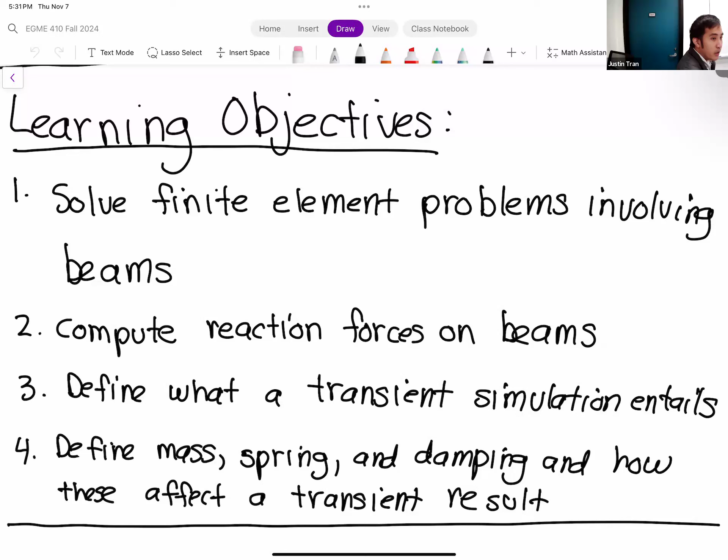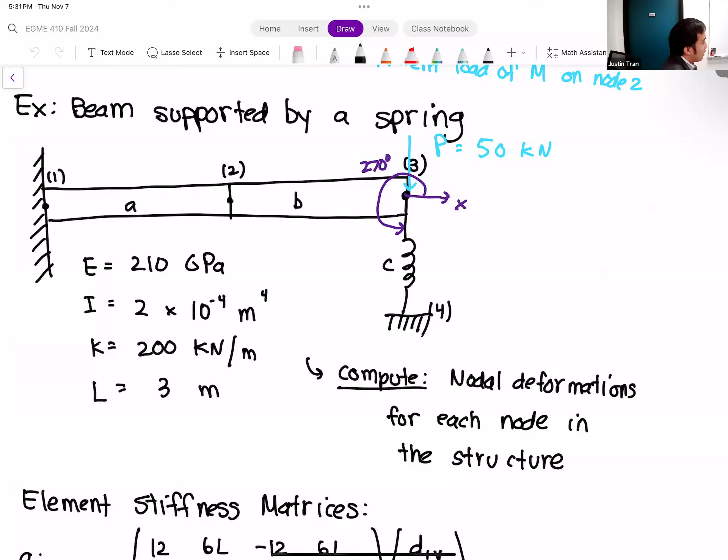Okay, all right, so let's go ahead and pick up where we left off. So actually, let me go ahead and scroll up, just so you can look at the problem that we were looking at before, okay? So last time we were here on Tuesday, we were working on this beam problem. So you can see here we have two beams, beams A and B, and they're being supported by a spring on the right. Okay? So this is a combination of beam and spring elements in the same problem.

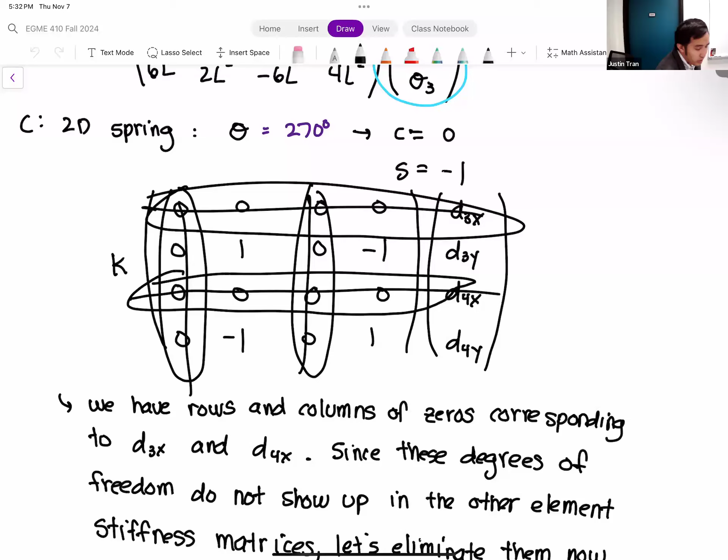So we were working through this problem, and we computed the element stiffness matrices for each element, and that includes the two beams and the spring, okay? So for the spring, we did something a little bit special where, even though it's technically a two-dimensional spring, because that spring is rotated upwards, we saw that there's no reason for us to keep the x deformations in our spring equations, okay? So we basically removed them, and we ended up with this element stiffness matrix here, where we have k times 1, minus 1, minus 1, 1, times the two y direction deformations, d3y and d4y.

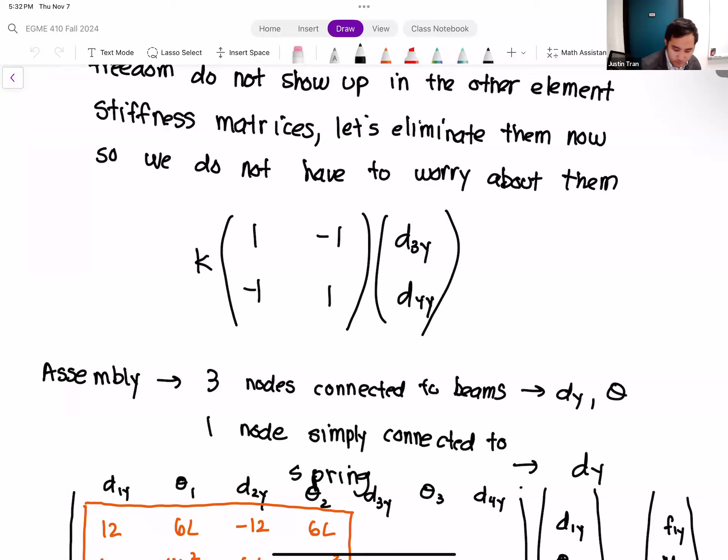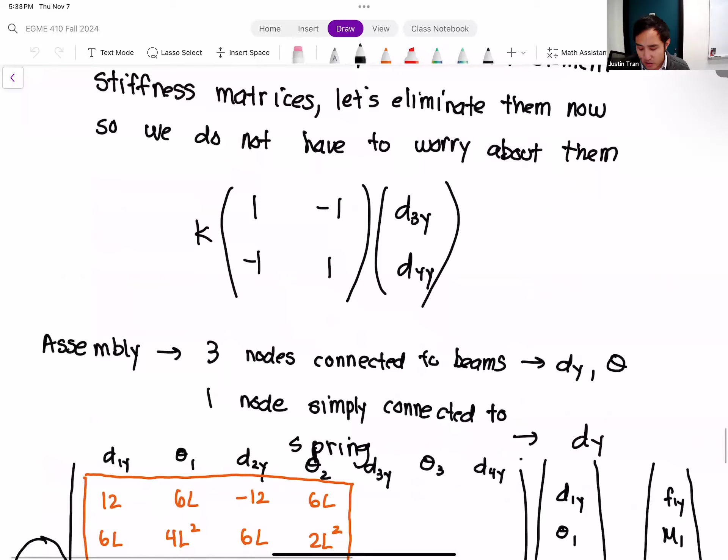Okay. And so the last thing we did was we input these into our stiffness matrix here. So we included the element stiffness matrices for our two beams, element A and element B in orange and green. And then our spring we input in purple down in the bottom. Now remember the key point here is that, because the constant out in front of the spring element stiffness matrix is different than the beams, we just need to make sure that we account for that when we add these into our equation here. Okay, so that's where we left off. Let me go ahead and fill in all of the blank spaces too with zeros. All right, so there is our fully assembled global stiffness matrix.

So the next thing we need to do here is we need to apply our boundary conditions. And so we had two constraints and one load here. So we go back up to the figure. We can see that we have a fixed support on node 1. We have a fixed support on node 4. So those are our two constraints. So let's go ahead and apply these first to our global matrix.

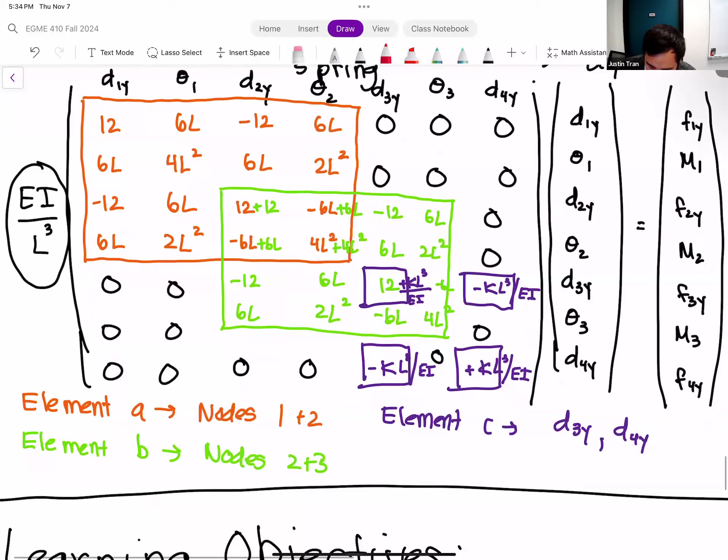Okay, so fixed support on node 1 means that we're going to cancel out both of the degrees of freedom at node 1. So that means d1y and theta 1. So let's go ahead and clear those out. So that means this first row here and the second row. All right, so let's do what we usually do when we have constraint type boundary conditions. Let's replace the entire row. And so we're going to have zeros in every single entry except for the diagonal entry.

So that means for the first row here, we have 1, 0, 0, 0, 0, 0, 0. And then on the right hand side, instead of f1y, we're going to replace that with a 0. And then in the second row, we have 0, 1, 0, 0, 0, 0, 0, and then we replace m1 with a 0. All right, so same as we always do.

All right, the other constraint type boundary condition that we had was on node 4. Now we only have one row here that corresponds to node 4 because it was only attached to the spring. So that's going to be the last row in the matrix.

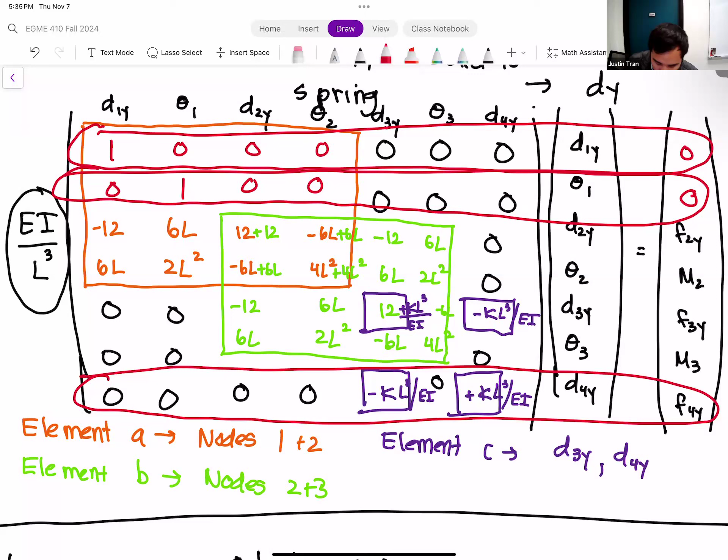Okay, so once again, we're going to replace everything with zeros here. The only one that's going to be non-zero is going to be the diagonal entry, which for the last row is going to be the last column. And we're going to put a 0 in the right-hand side. Okay, good. So our constraints are taken care of now.

Next thing we need to do is to incorporate our load. And so we go back up to the problem. We can see that we have only one load applied on this figure, which is a load of 50 kilonewtons applied in the negative y direction on node 3. Okay. And so we go to the row here that corresponds to the y direction on node 3, and so that is what number? 1, 2, 3, 4, 5th row. Okay.

Right, and so since it's a load type boundary condition, we're only going to place the load in the right-hand side vector. And so we have a load of minus P over there. And then everything else, because we don't have any other loads, we're just going to replace everything on the right-hand side vector with zeros. Okay.

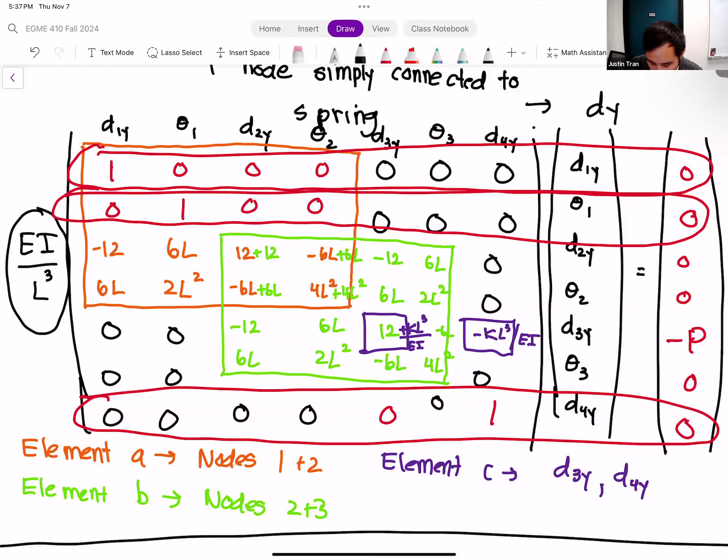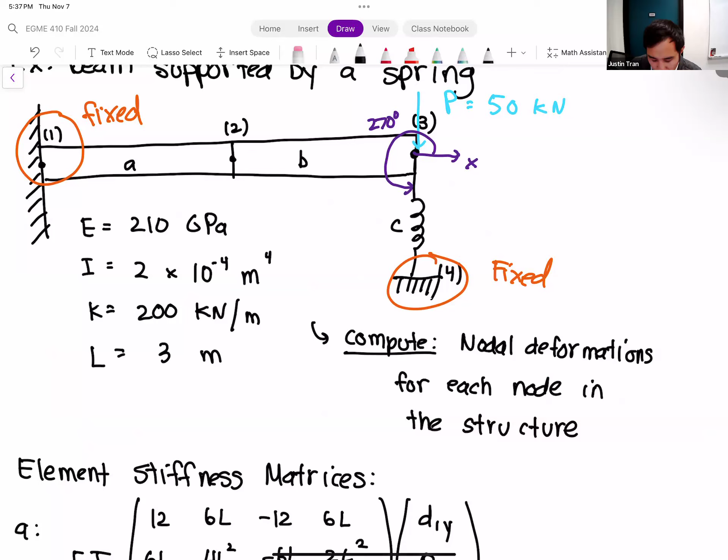All right. So we finally have our linear system here. And so let's go ahead and solve it. We actually have numbers here that we can plug in. Just to remind you, the numbers for this problem are, we have a Young's modulus of 210 gigapascal, a moment of inertia of 2 times 10 to the minus 4. For the spring, we have a spring constant of 200 kilonewtons per meter, and the length is 3 meters.

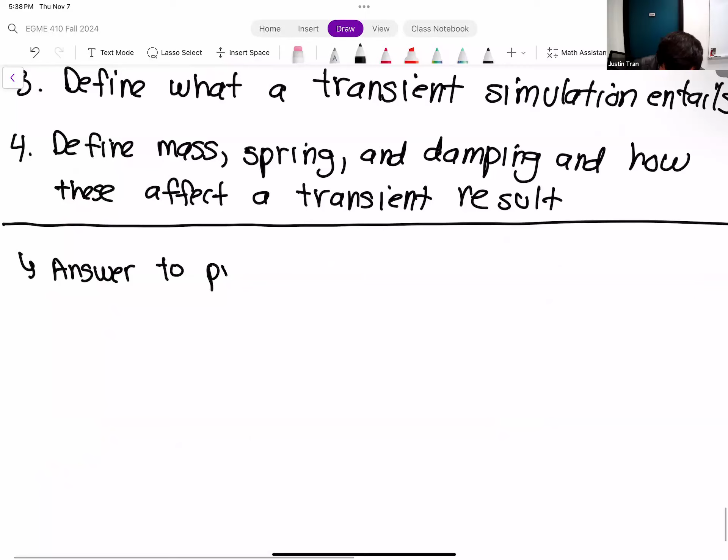Okay. And so we plug all those in as well as the value for the load. And I was not smart about this, so I didn't leave room for it. So let me go ahead and write the answers down here. And so we plug all these into MATLAB, and what we get is: first we have the deformation and the rotation at node 1. So we have d1y, theta 1. Remember, node 1 was fixed to the wall, and so these should give us 0.

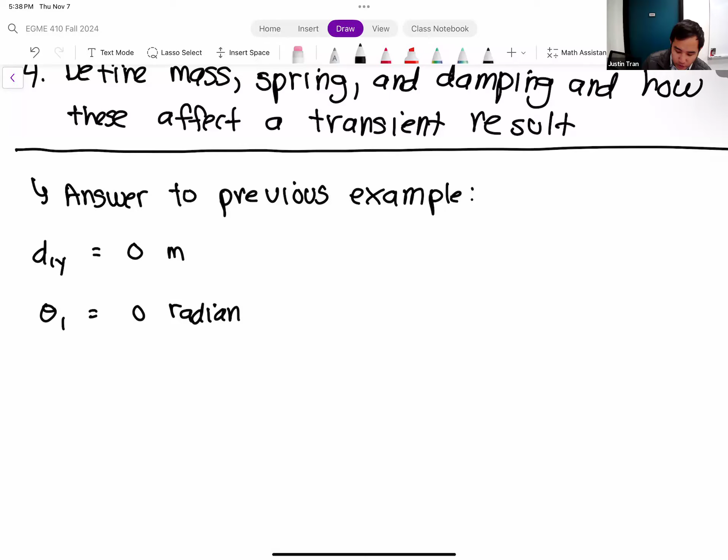When you solve for the rotations in beam problems, usually they're given in units of radians, okay, which is technically unitless. But there is a difference when you express angles in radians versus expressing angles in degrees. Okay.

Next, we have the deformations and rotations at node 2. So this is the node in between our two beams. Okay. And so we plug into MATLAB, and what we get is d2 is minus 0.02 meters. Okay. And the rotation here is minus 0.012 radians.

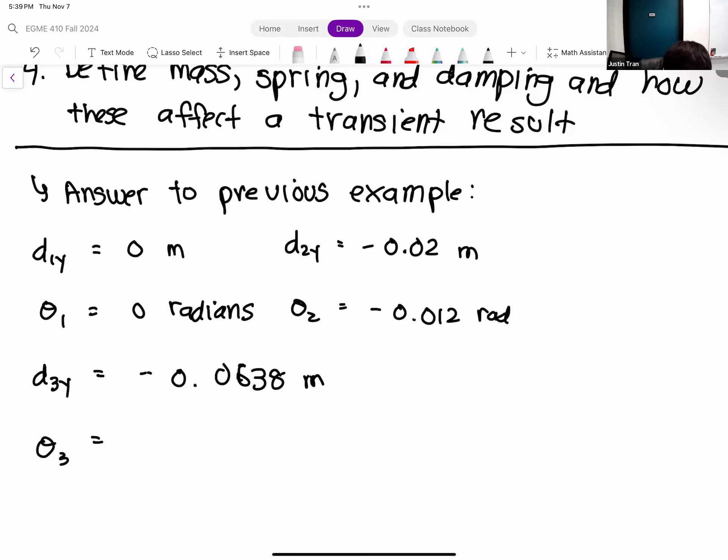Okay, then we have the same solution at node 3. So for node 3, we have a deformation of minus 0.0638 meters. Okay. And then theta 3 here is minus 0.016 radians.

Okay, and then finally we have d4y, node 4, the only node that's attached to the spring. It's also attached to the ground. And so we end up with a vertical deformation of 0 for node 4. Okay.

So of course, getting these numbers, it's almost a little bit meaningless to go over this in the lecture, just because it's all about plugging into this matrix here, putting it in MATLAB, and you somehow get this. Okay, but in case you want to run through the problem yourself and make sure that you got the right answer, you got the right matrix, then this is the result here. Okay.

By the way, people have asked me, what is the midterm exam going to be like? So of course, you're not going to be able to use MATLAB on the exam, and so I'm not going to expect you guys to compute solutions like this. I know some graphing calculators are able to solve linear systems, but not everyone has a graphing calculator like that. And so for the exam,

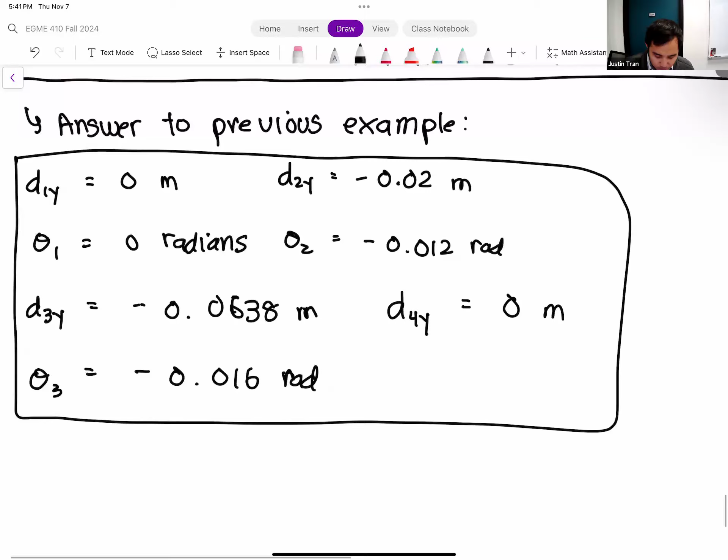my only expectation is that you're able to get to this point right here, okay? So you should be able to define the global stiffness matrix. Actually, you should take it one step further than this. You should at least plug in all the values here, okay? And so if you're able to show me the global stiffness matrix with all the appropriate values and all of the boundary conditions properly fitted in, that's what I'm gonna ask you on the exam, okay? All right, any questions on this?

Okay, good. All right, so one last point before we move on from direct stiffness is this idea of computing reaction forces.

Okay. So what are reaction forces? Reaction forces are forces that are placed on your model that are not explicitly external loads. Okay. Another way to put this is that in order for your structures here to achieve static equilibrium, right? What do we know about static equilibrium? We know static equilibrium exists when the sum of all the forces on a model equals 0. Okay.

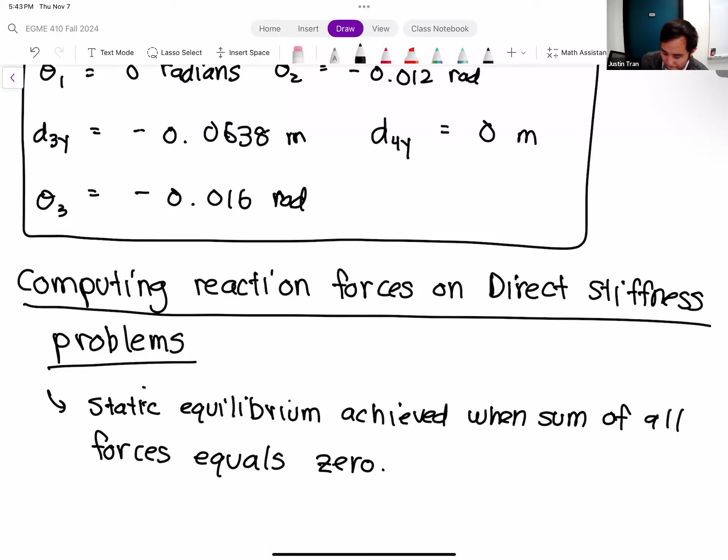That's kind of the first thing that you're taught in introductory physics. Okay, so all the structures that we're considering are in static equilibrium, but we enforce it in a slightly different way. For our finite element problems, the way that we enforce static equilibrium is by enforcing these constraints, right? So we have our fixed supports, roller supports and pin supports. In reality, these supports or constraints have to exert forces on the model in order to maintain static equilibrium.

These forces that are applied at our constraints, we call reaction forces, because they are exerted in reaction to other external loads. It's the same thing with us, right? Just by sitting or standing in this room, your body is mostly in static equilibrium. No one is shooting across the room at 50 miles an hour. There is a constant force of gravity being applied on us, so to maintain static equilibrium, the ground has to exert an equal and opposite reaction force upwards. That's basically Newton's third law.

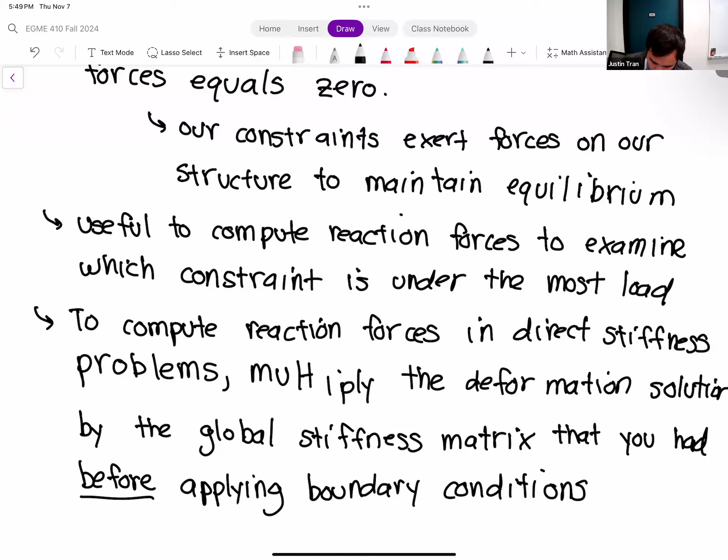Okay. But you're not going to multiply it by your final global stiffness matrix. You multiply it by the global stiffness matrix that you had before you applied the boundary conditions. Step one of our direct stiffness methodology is to write out the element stiffness matrices for all the elements. Step two is to assemble them into the global stiffness matrix. Step three is to apply the boundary conditions. So in between step two and step three, we had a global stiffness matrix. It wasn't one we could solve, but we can use it for this step.

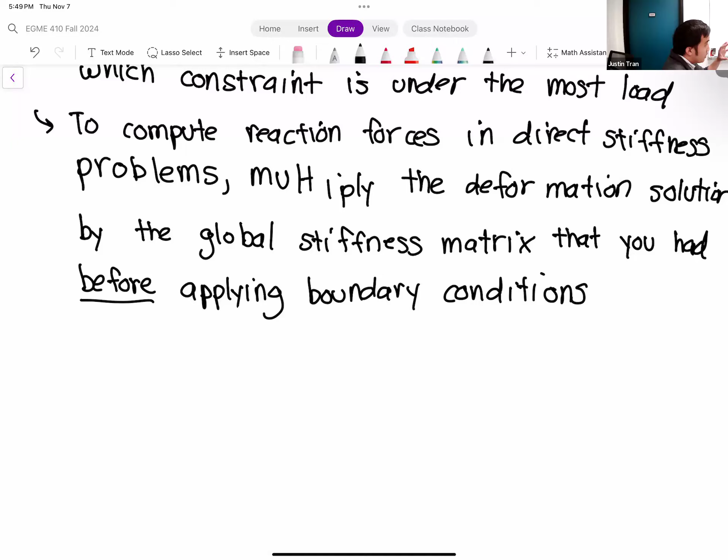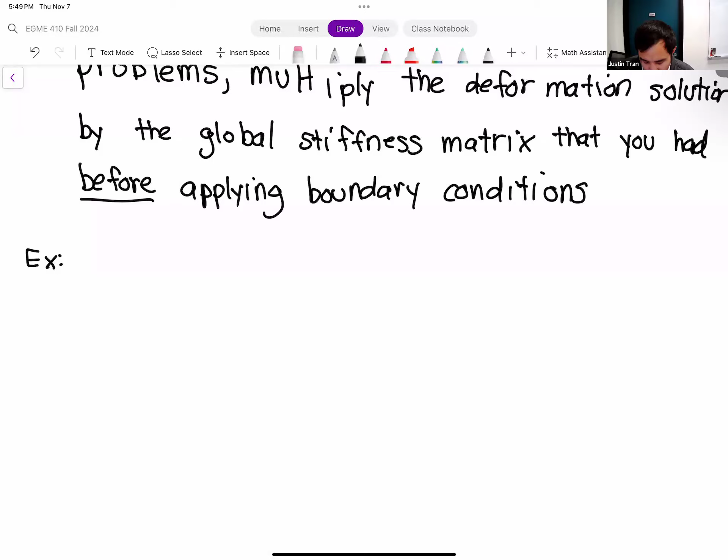So for example, for the last problem, let me write out our global stiffness matrix again, but before we apply the boundary conditions. The matrix I had in the previous problem was our matrix after we applied the boundary conditions. If you're watching this on YouTube later and rewind to the beginning of the lecture, the global stiffness matrix you saw there wasn't the matrix we wanted. Okay.

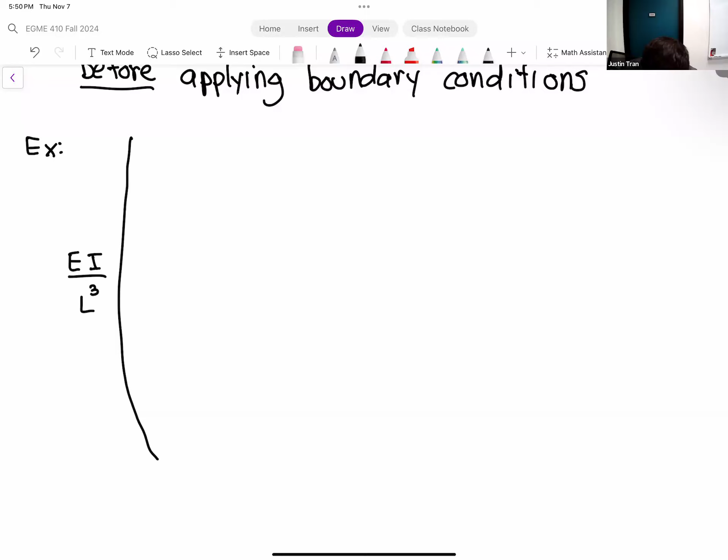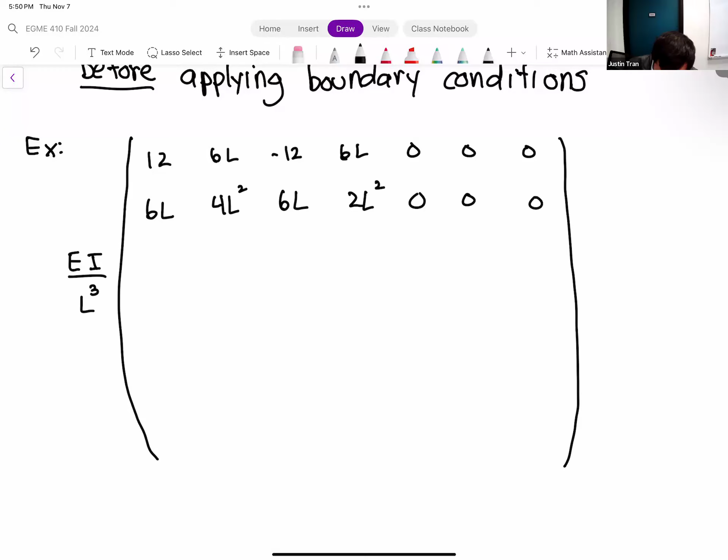So if we write out that matrix again, we get EI over L cubed multiplied by a 7x7 matrix. The first row is 12, 6L, minus 12, 6L, 0, 0, 0. Second row is 6L, 4L squared, minus 6L, 2L squared, 0, 0, 0. Next row is minus 12, minus 6L, 24, 0, minus 12, 6L, 0. Then 6L, 2L squared, 0, 8L squared, minus 6L, 2L squared, 0.

0, 0, minus 12, minus 6L. Now we have this weird term here that has our spring constant: 12 plus K L cubed over E I. Minus 6L. K L cubed over E I.

Next row: 0, 0, 6L, 2L squared, minus 6L, 4L squared, 0. I know this is painful. Usually we don't do this, but because I didn't have the foresight to do this, I just applied the boundary conditions straight on the matrix from earlier. So this was a consequence of my own demise.

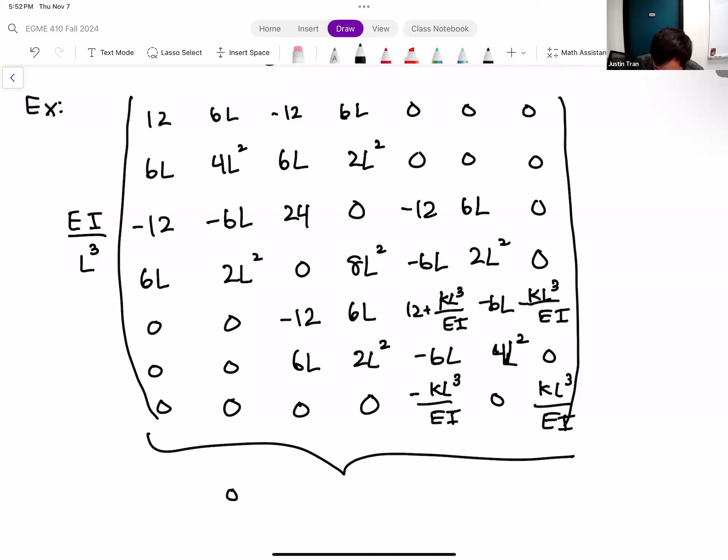All right, but we're on the last row. Last row is probably the easiest. So it's mostly zeros here. We have minus KL cubed over EI, 0, and then positive KL cubed over EI. Okay. So this right here is our original global stiffness matrix. This is the one that we had before we applied boundary conditions.

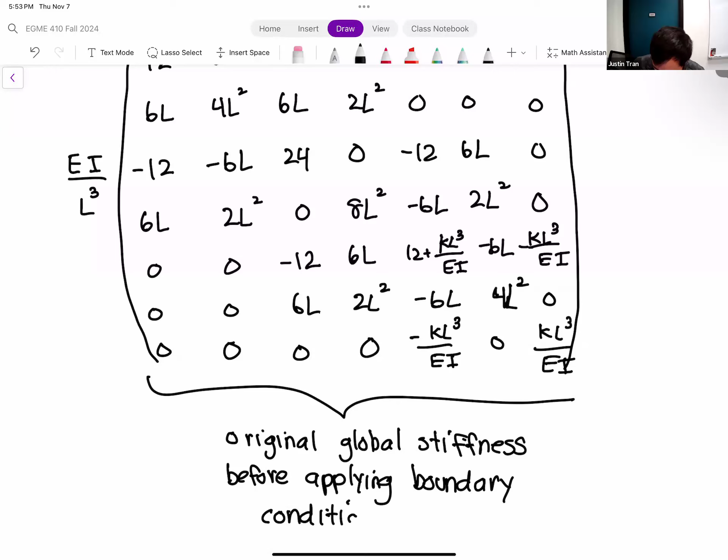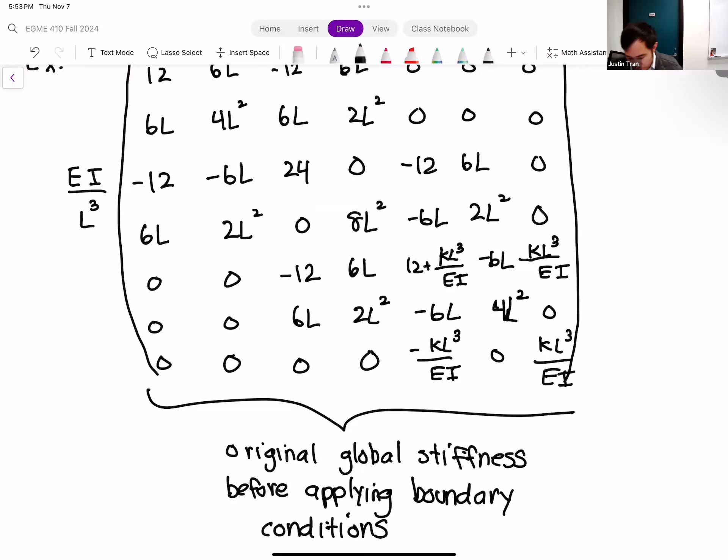All right, so we're going to take this matrix and multiply it by our deformation solution, the solution that we got at the end of the last example. We're going to multiply it by a vector here, and of course you would probably perform this multiplication in MATLAB. You multiply by d1y, theta 1, d2y, theta 2, d3y, theta 3, d4y. But unlike in the previous problem, we actually have values for all of these because we already solved. So we're just going to plug in exactly what we found up here into this vector.

So for d1y we have 0, theta 1 we have 0, d2y we have minus 0.02, theta 2 is minus 0.012, d3y is minus 0.0638, theta 3 is minus 0.016, and d4y is 0. So everything in this vector here is our deformation solution.

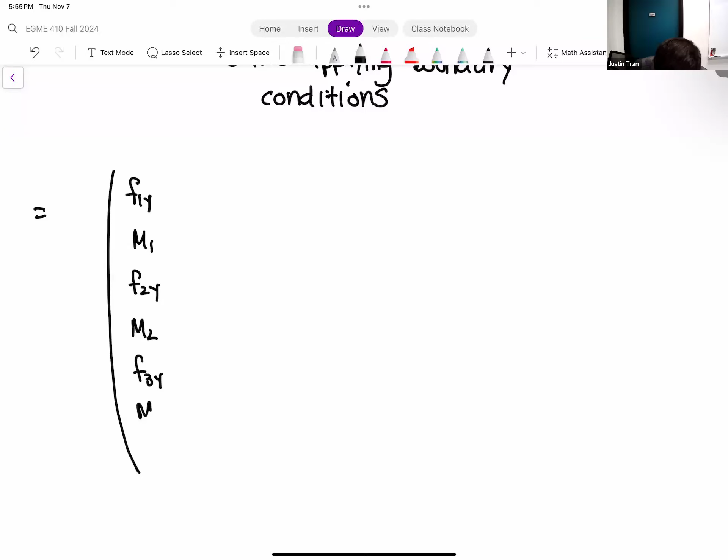Okay. And so if we perform this matrix vector multiplication, we end up with the following. We have a 7 by 7 matrix multiplied by a 7 by 1 vector, and so our result here is going to be 7 by 1 as well. Each entry in this vector corresponds to a nodal force or nodal moment that's being applied on our original structure. So this is F1y, M1, F2y, M2, F3y, M3, F4y.

So we perform that multiplication, we end up with the following. What you're going to notice is that we have non-zero entries in two situations: for nodes that have a constraint applied to them, and on the nodes that already had loads on them to begin with. So first we have node 1. Node 1 had a fixed support, so we should get a non-zero entry here. F1y is 37.023 kilonewtons.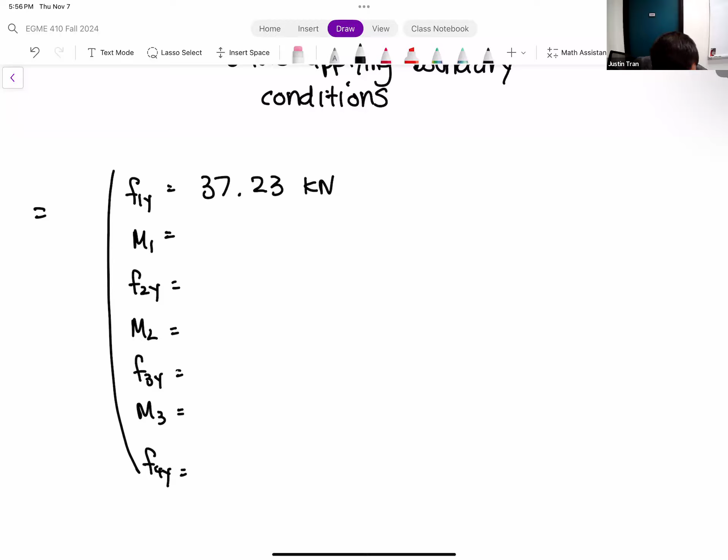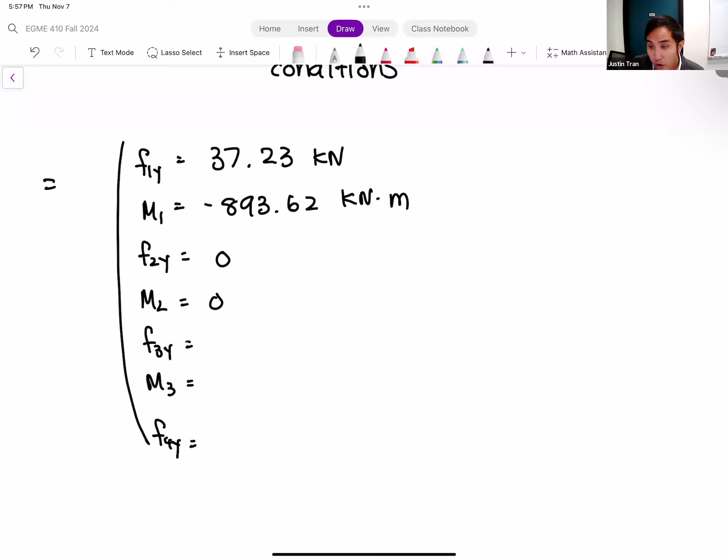M1 is minus 893.62 kilonewton meters. Node 2 did not have any forces on it, nor did it have any constraints, so node 2 gets 0, 0. Node 3 was where our external load was being applied. F3y we have minus 50 kilonewtons. M3 is going to be 0. We didn't have any moments applied on node 3.

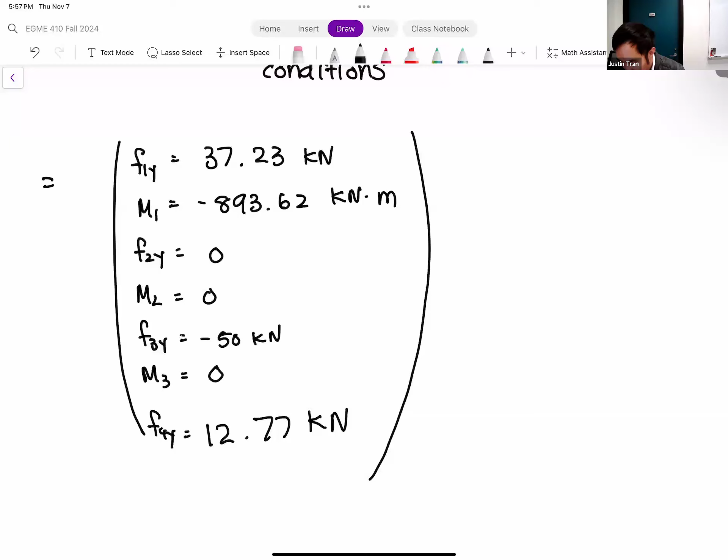And node 4 was our node that was attached to the ground, attached to our spring. We have 12.77 kilonewtons. Okay, and so this vector represents the reaction forces on our structure. All right, any questions on how we got this result?

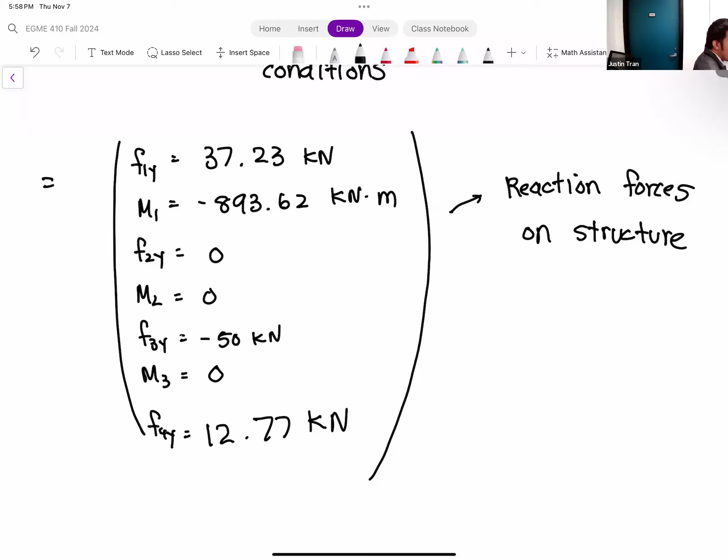So once again, when I jump from this step down to this step, it kind of seems like I pull these numbers out of my butt, right? But if you actually perform the matrix vector multiplication, you end up with this result.

All right. And so with that, we are closing the chapter on the direct stiffness method. This is going to be the last thing that I'm going to expect you to know for the midterm exam. So the midterm exam stops here.

So I think we spent the last 3 or 4 weeks talking about the direct stiffness method. It was a lot of theory and a lot at once. But now we're getting back to what I think everyone wants to do in this class, which is ANSYS. We've already covered all the main basics in ANSYS, so you guys at this point are pretty good in ANSYS.

I think your guys' projects kind of demonstrated that, and so my goal with the remaining semester here is to teach you some more advanced features in ANSYS, and maybe some features that you may not use every single time, but do represent really interesting and really useful features for certain situations.

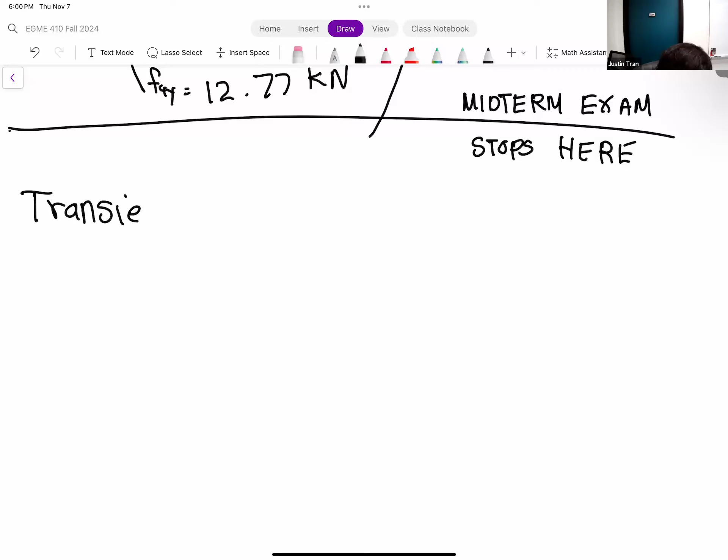Okay. Well, let's talk about activity 5. So activity 5 goes over a very kind of interesting topic, one that I honestly wish we had more time to go over because it is really useful for some situations, which is transient simulations. Okay.

So what do I mean by transient simulation? So transient, the word itself means that it changes with time. So what I mean by transient FEA simulations is that these are simulations of phenomena that naturally change with time. So these are unsteady simulations.

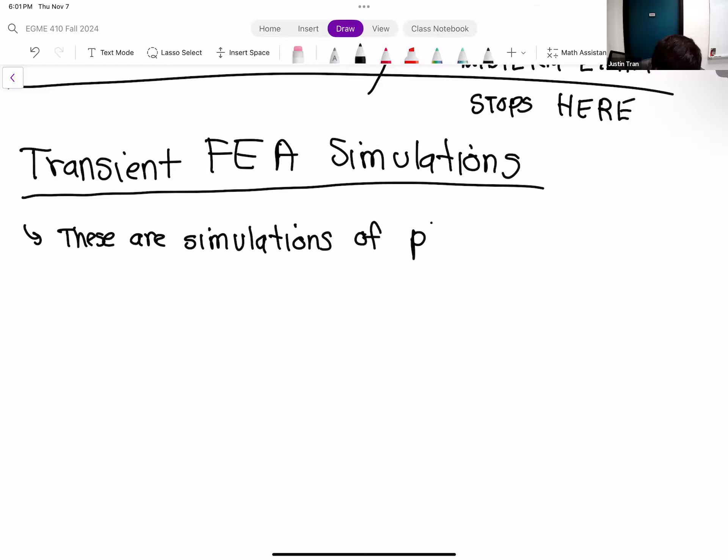So, I know we just got done talking about earlier today that we usually do finite elements for static situations. Well, the world of engineering goes way beyond just static situations, right? Mechanical engineering in general is actually known for designing systems that move, right? So automobiles, airplanes, things of this nature, okay? And so you can do finite element simulations of transient situations. It just requires a different set of tools for it, okay?

Okay. So ANSYS does have the ability to simulate dynamic or transient situations, okay? But one thing that you have to kind of understand before we begin is that when you're trying to simulate a dynamic situation, it's always going to be much, much more expensive than a static simulation.

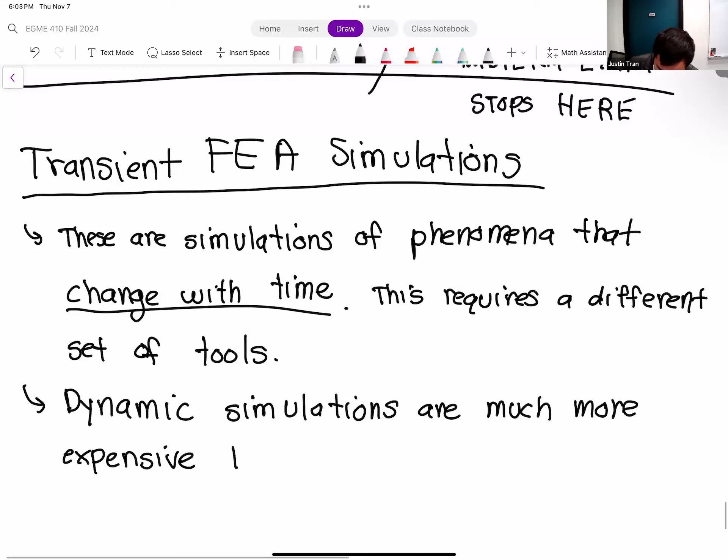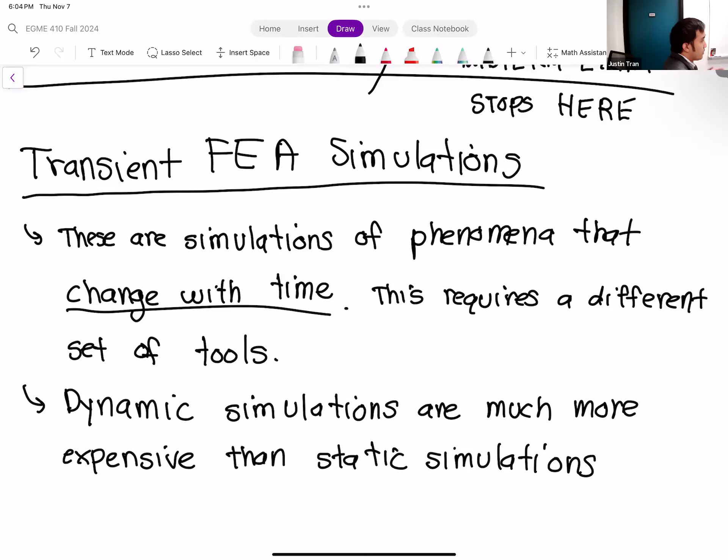Okay. And we'll go over kind of the reasons for this in a bit, but just kind of intuitively, right? When you run a static simulation, your result is also static, right? So you can kind of capture a result with just a snapshot. For a dynamic situation, something that changes with time, that means your results are also going to change with time as well, okay? And so instead of being a static image, the results of a dynamic simulation are not exactly like a video, but you can think of it like a video, right? So something that's changing with time.

And what is the way that we often think of videos, when we're watching videos on YouTube and stuff, right? One way that we can think of videos is that a video is nothing more than just a bunch of static images that we play back to back very, very quickly. Okay. And so a dynamic simulation is kind of the same thing, right? A dynamic simulation, you can think of it as many, many static simulations that are just simulated back to back to back to back.

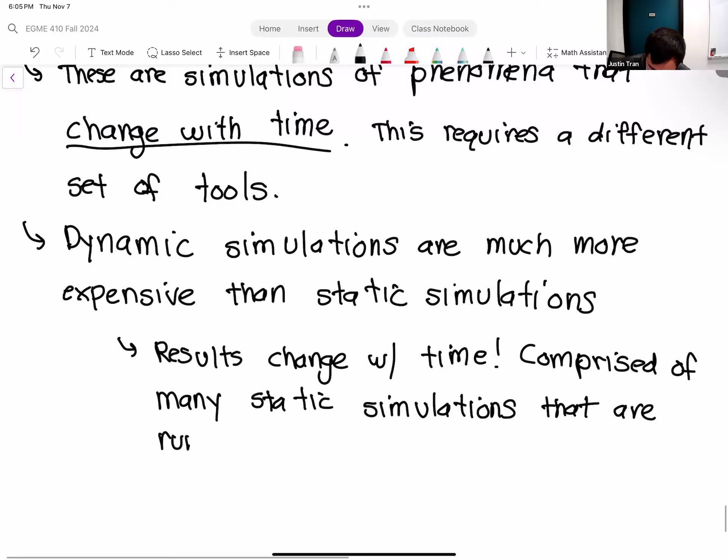Okay. And so one way that you can think of a dynamic simulation is that you're running hundreds or thousands of static simulations, just one after the other, okay? And so that just kind of drives up the cost. So for a dynamic simulation, honestly, for the most part, you often don't really do dynamic simulations on a desktop computer like you guys are running. Okay, you can do a fairly simple one, and for activity 5, we're going to do a fairly simple simulation of a car crash. But for anything that requires any kind of complexity or a decent sized mesh, most of those are actually run on supercomputing clusters.

Okay, actually, one of my grad students, he's just about to finish up. He ran basically unsteady simulations on multiple different models, and we had to use a supercomputer for them. Okay. So he ran his simulations on a supercomputer which had 96 processors running in parallel to each other. Okay, so that just kind of gives you an idea of how much more cost these simulations have compared to your static simulations on the computer. All right, any questions on this so far?

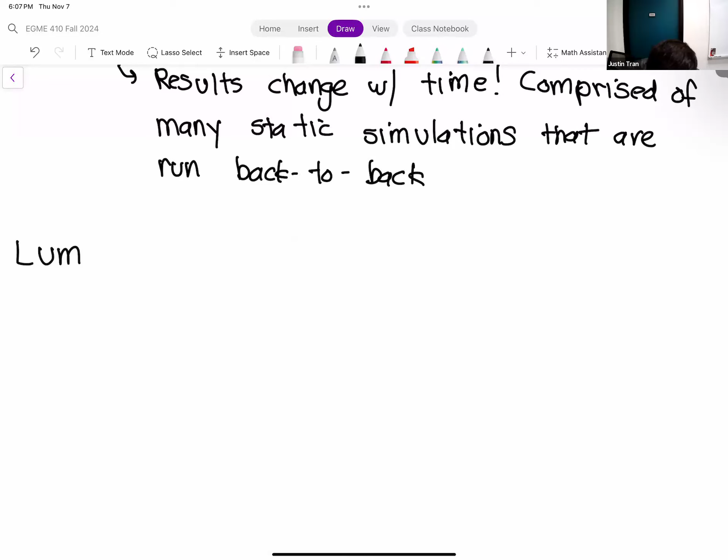Okay, good. All right, so before we get into the nitty-gritty details in terms of how dynamic simulations are run, let's review some stuff to give us some intuition, okay? And the intuition is going to be important for us because, just like in the static simulations, a big part of doing FEA is being able to interpret your results and do sanity checks to make sure that your results actually make sense, okay? So the way we're going to do that for dynamic simulations is we're going to review this concept of a lumped mass model.

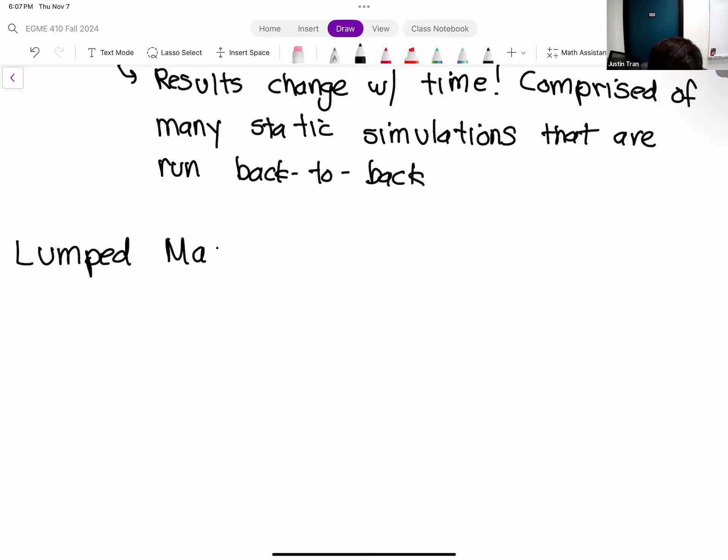Okay. So a lumped mass model is nothing more than just a mass, a spring, and a damping constant. Okay. Don't worry, I know there's a spring, but we're not going to be doing any direct stiffness here.

So there's lots of different drawings and lots of different ways to represent a lumped mass model. This is just one of them. So we have our mass that's on wheels here. We have a spring constant K. This kind of strange device that I have in the bottom left, this is sometimes called a dashpot. So it has a damping constant C. And then we're pulling on the entire structure with force F.

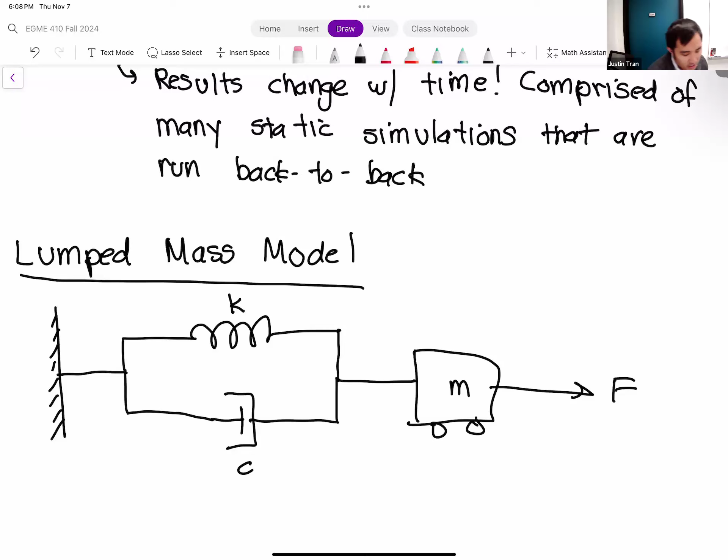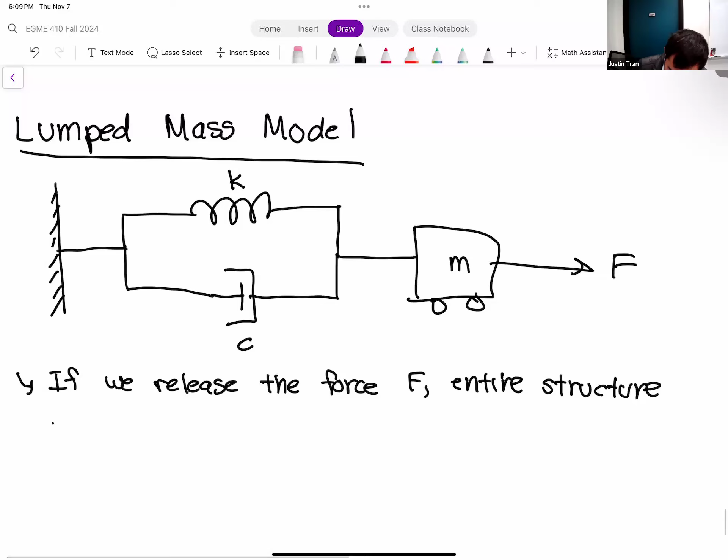All right, so the basic idea with this is that if we pull on the structure with the force F and then release it, then this entire structure is going to oscillate back and forth. In fact, you can write out the governing equation for this structure, and it's going to be a second order ordinary differential equation.

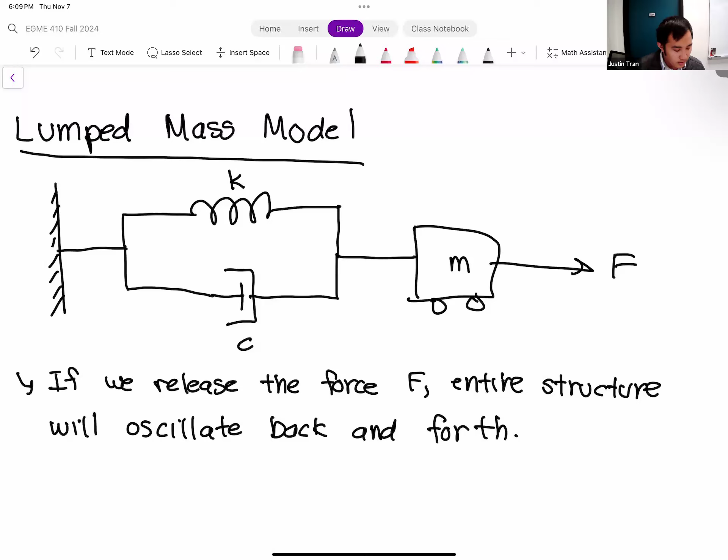I won't write out the equation just because I think that might bring out some trauma from 308s. So instead, I'll show you what the solution looks like. All right. And so the way that we usually describe this solution here is that we say that it is a damped oscillator.

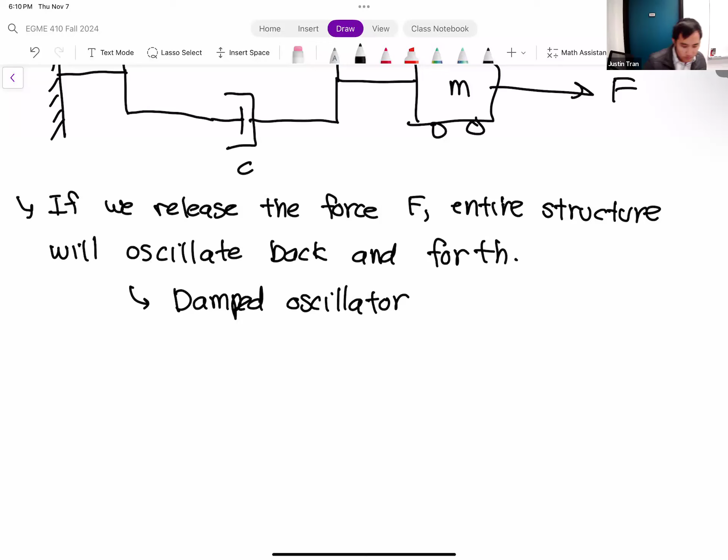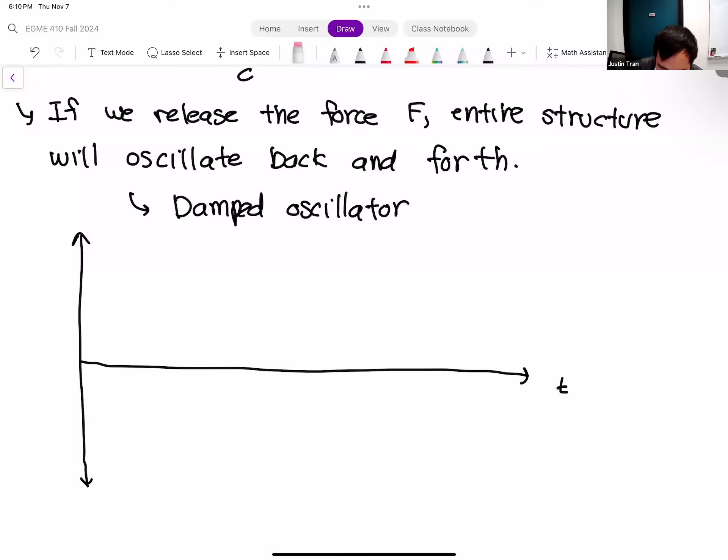And so it's going to oscillate back and forth, but it's going to be damped. And so what that basically means is that the magnitude of the oscillations are slowly going to go down. So if we plot out the oscillations as a function of time, the horizontal axis here is going to be time, and then the vertical axis here will be the horizontal position of the block. So this is x as a function of t.

Our plot would look something like this. So we're probably going to start with a peak. It's going to oscillate downwards. But then over time, you can see that the magnitude of this oscillation is starting to go down. So each of these oscillations here represents a vibration. But eventually it'll come to rest because of the damping in the system.

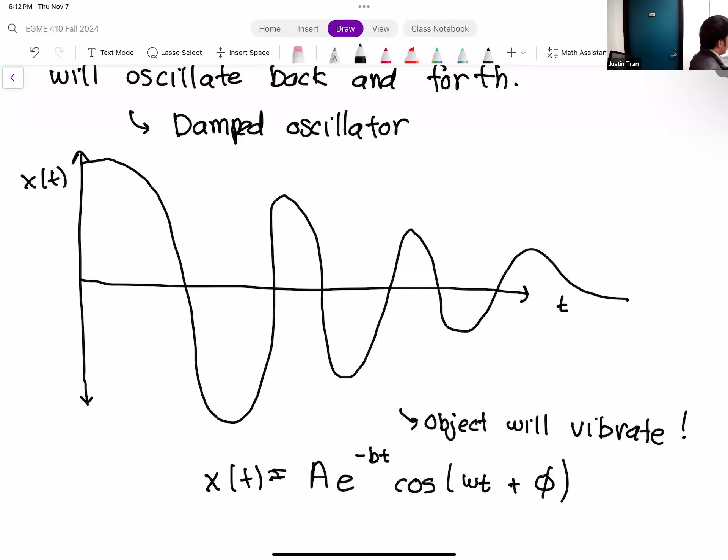All right. And so the exact solution here, or at least a form of the solution, is x of t is equal to A, where A here is the initial magnitude of the oscillation, multiplied by e to the minus b times t, cosine of omega t plus some shift. We have a cosine term with a decaying exponential for the magnitude.

Okay, so why am I bringing this up? Why are we reviewing this lumped mass model? Well, when you talk about dynamic behavior of structures, one of the most important properties to consider is the vibration properties of that structure.

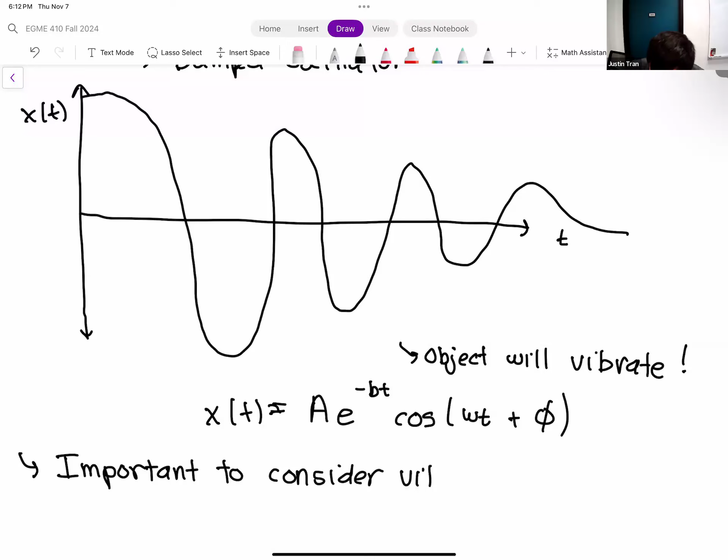Because no matter what structure that you have, as long as it has mass, if you strike it or agitate it, it's going to have a vibratory response. And that vibration is important to analyze for resonance purposes. You want to make sure that you're not causing resonance when you load it. But it can also help to understand the structure in general.

So nowadays, vibration analysis is, of course, not an afterthought, it's an important thing, but we can understand vibration very clearly because of finite elements. And so it's not as big of an issue today, just because we can estimate vibration pretty accurately. But before the age of computers and before the age of finite elements, engineers had to determine the vibration or the dynamic qualities of a structure without running a simulation.

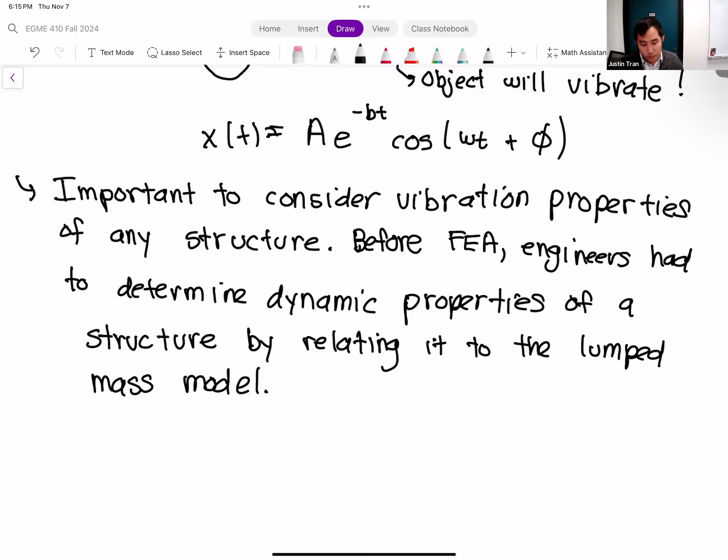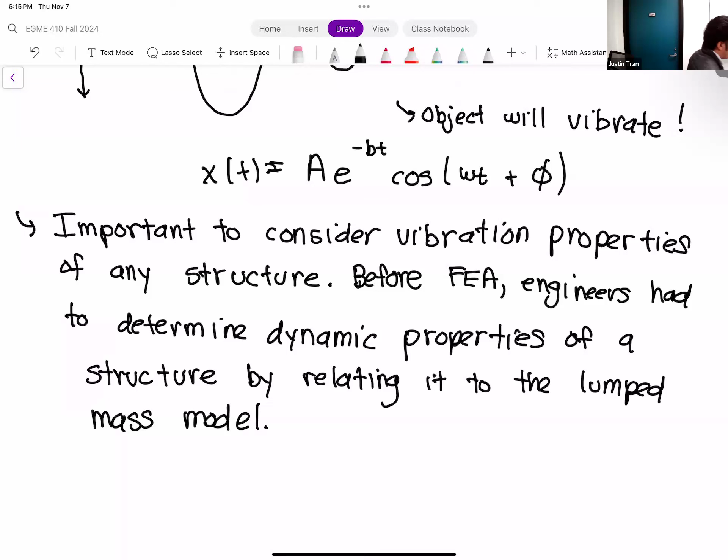All right, because the one thing about the lumped mass model, we know from before that it follows a second order ordinary differential equation, and so it's something that we can directly solve, right? And so what we know about the lumped mass model is that each of the structural properties of the part can be linked to a certain behavior characteristic of the solution itself. And so, for example, the mass of the structure will determine the structure's inertia.

And what is inertia? Inertia is the resistance to changes in momentum. Okay. And so basically, the more mass something has, the harder it is to get it moving, right? So we kind of intuitively know that. It's very easy to take a textbook and just yeet it across the room.

But then if you took like a car, if we had somehow got a car in here and we try to push it, it's a lot more difficult to push the car just because the car is a lot more massive. Okay. And so basically the higher the inertia, the higher the mass, this is going to reduce the frequency of vibration.

Okay. Because a vibration is nothing more than just kind of a change in direction of the momentum. So the more mass something has, the more easily it's able to resist that change in momentum. Okay.

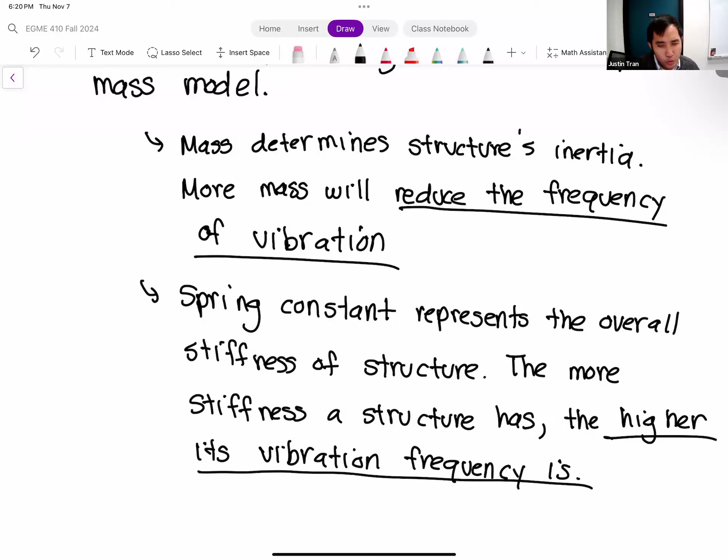All right. So the last factor for the lumped mass model is the damping constant. So the damping constant kind of has a unique effect. The damping constant is the only aspect of the system that actually tells you how quickly the vibrations are going to damp down.

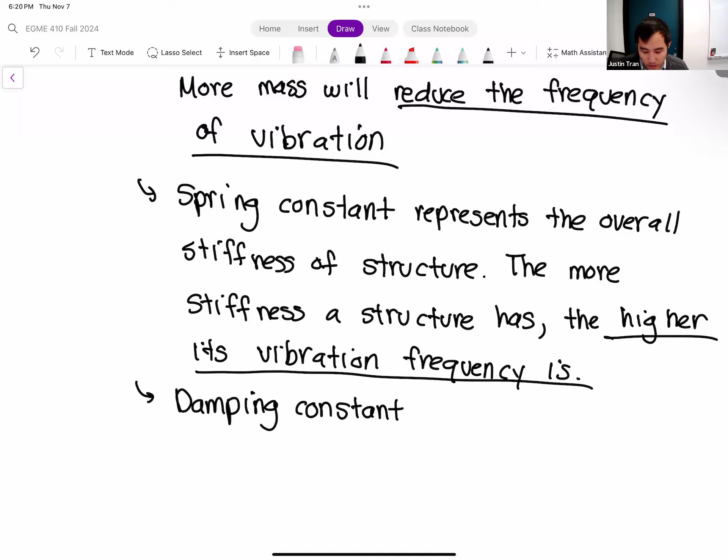Okay. Remember, from the image that we had above, eventually these vibrations are going to decay down to zero, right? It just doesn't keep oscillating forever. And so the main physical quantity that causes this decay is the damping constant. Okay. So the more damping you have in your system, the more quickly you can suppress these vibrations.

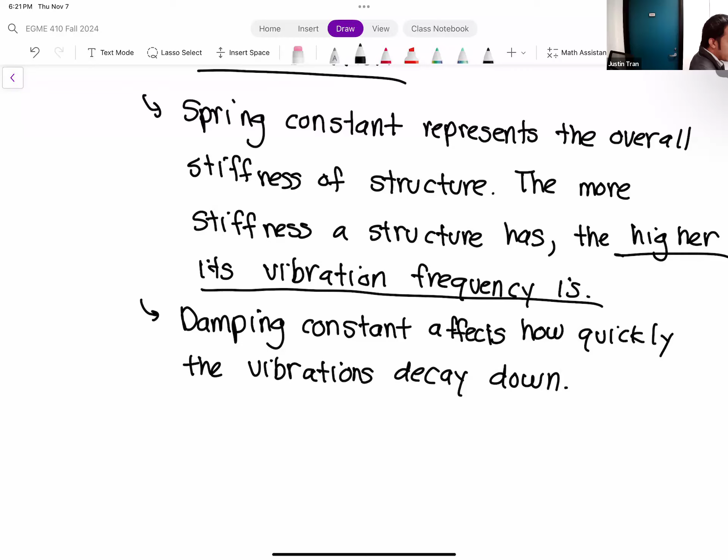Okay. Which again is a very important property, because if you have a dynamic situation, for the most part, you want to decay the vibration down as quickly as possible. If vibrations tend to persist in your structure, you kind of have something wrong with it. Okay, so making sure there's adequate damping in a structure is really important. Okay.

Okay. So before the age of finite elements, what scientists and engineers had to do was look at a structure, look at its properties and determine, what is the effective spring constant, what's the effective damping constant. Mass is easy to determine, mass you can measure. So to predict dynamic response,

okay. Sometimes it's easy to do, sometimes it's not so easy, because these are very simple parameters, and if you have a very complex structure, then it's very hard to do. Okay. Now, of course, with FEA, we don't have this task, so we don't need to estimate these things. We just let ANSYS determine them for us.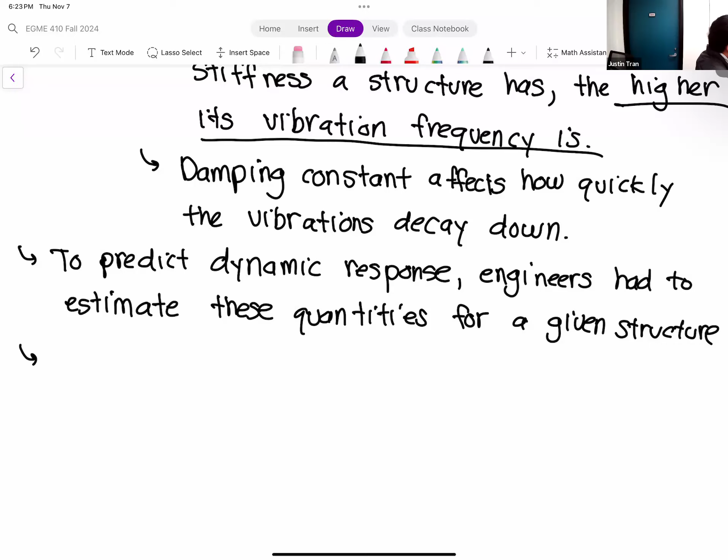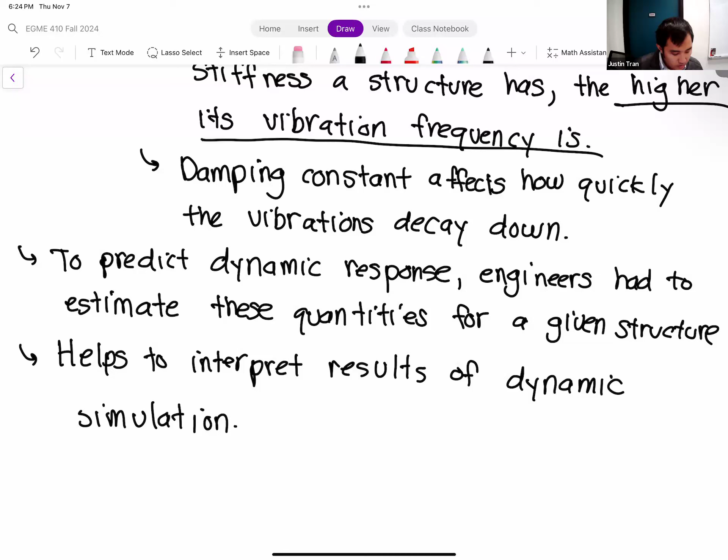And so when we do activity 5, and we're looking at the results, I want you guys to take a minute to actually look at the results and think about this idea of the lumped mass model. So this whole thing helps to interpret results of a dynamic simulation. All right, any questions on our lumped mass model here?

Okay, so before we head out for today, I did want to start the next section of these notes, which is, how do we actually go about solving these dynamic problems? Like I mentioned earlier today, for dynamic simulations we have to use a different set of tools for finite elements. We're still going to be deriving element stiffness matrices, or at least ANSYS is going to do that. We're still going to be able to solve. But there's an additional set of parameters that we have to account for, that are unique to dynamic simulations. Okay? So let's talk about numerical solutions to dynamic problems.

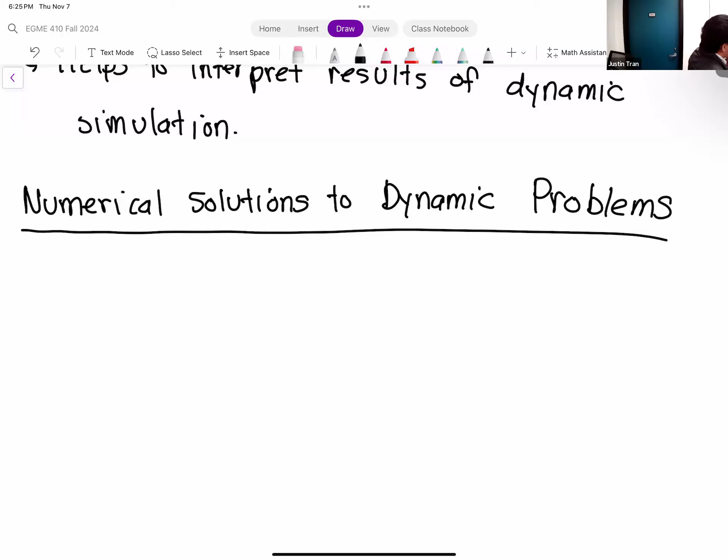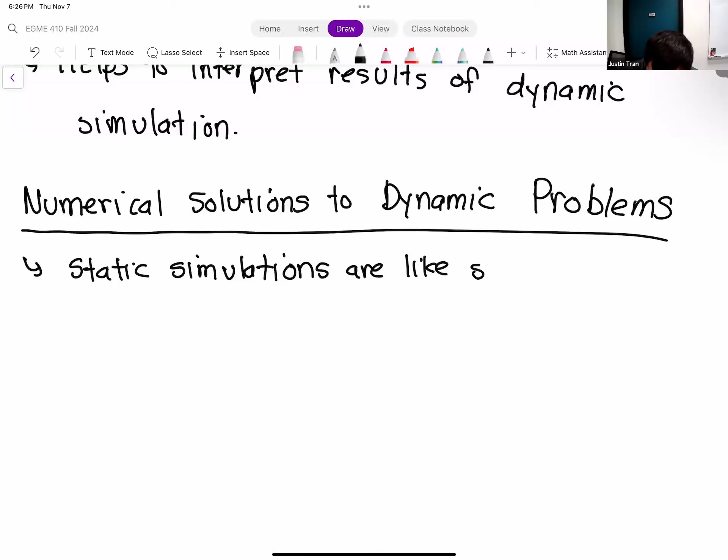Okay. So, like I mentioned earlier, dynamic problems are much more resource intensive than static problems. Instead of solving for the state of a single structure at a single point in time, you're basically simulating the response of the structure over a period of time. And so again, the analogy that I like to draw is that a static simulation, the results are basically like a snapshot. Whereas a dynamic simulation, you could think of it as a series of snapshots that are stitched together to form a video.

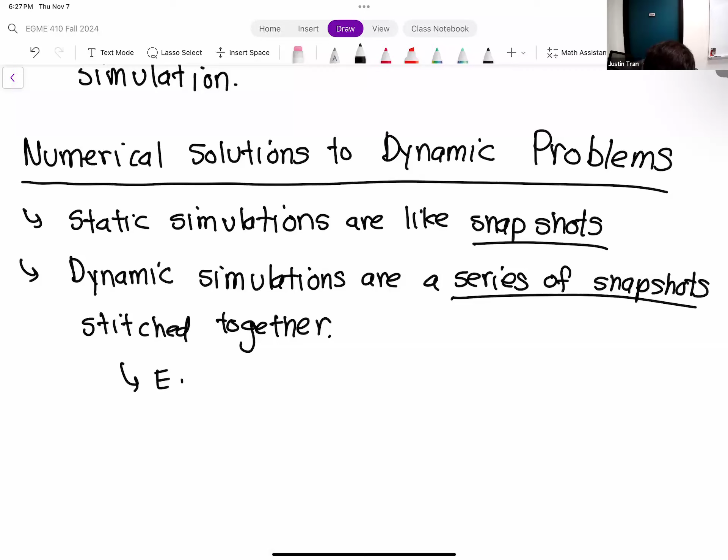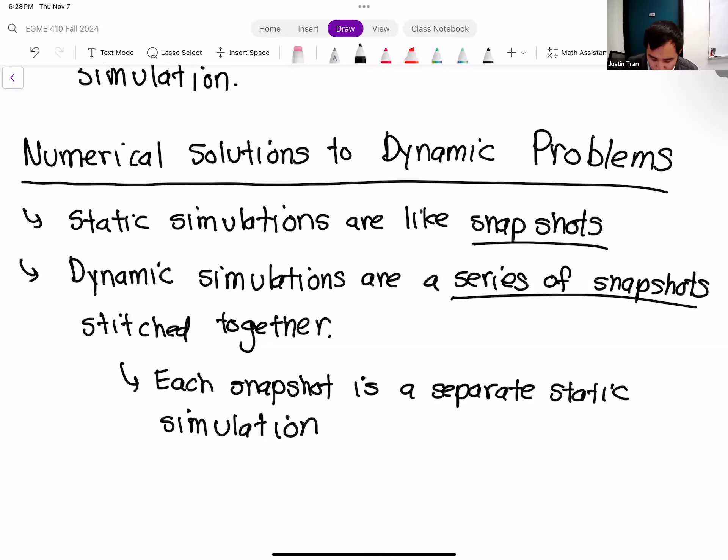Okay. And so each of these snapshots that make up a dynamic simulation is a separate static simulation. Okay. And so just to give you some perspective, when we think of watching videos, watching movies, playing video games, oftentimes we like to think about the frames per second in terms of how smooth is this animation. A very popular frames per second for video games is 60 frames per second.

And so what that basically means is that in the image that we're viewing, 60 frames are progressing for that 1 second. And that produces a really smooth image for you to view. But if you imagine this from a finite element point of view, having 60 frames per second means that we need to run 60 different static simulations just to simulate 1 second worth of time.

And so of course, it's going to take more than 1 second just to run one simulation. Even if each simulation takes a minute, that means to simulate 1 second of time for your structure, it's going to take you an hour to run the entire simulation. And that's not uncommon. So just to give you a frame of reference,